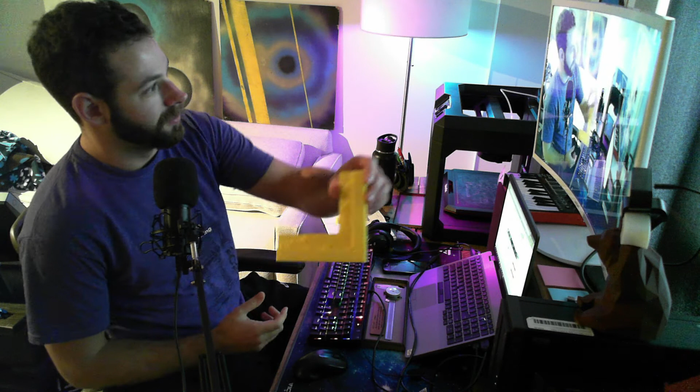All right, so I finished with my second iteration here. You can see this is my first one. The support material was really tough to get off. It printed like this, and then the piece that went in it was too thin, it snapped.

So I redid my design. I added a little flare to it. Now it's got an inlay, it printed in the opposite direction, so it's got its support raft. The raft prints to make sure it's easier to get off the build plate. So when you're done, you just peel the raft off. It might need to be sanded.

I probably won't do this finished design in yellow, but there you go, you can see it. It's got a hole so that you can mount it on the wall. That's going to have to be a little bit bigger.

And then here's the cap. So peel the raft off of this. There's also a fair amount of support material on this guy, which looks like it's going to be really difficult to get off. I'll do that here in a little bit. I may not end up using support.

In the meantime, it's not going to fit perfectly either way, because I'm a hypocrite. When I said that you need to match up sizes and they can't be perfect matches, because then it won't fit due to tolerances and the fact that prints aren't perfect, I didn't do that. So I'll have to remake that design with a slightly smaller hole.

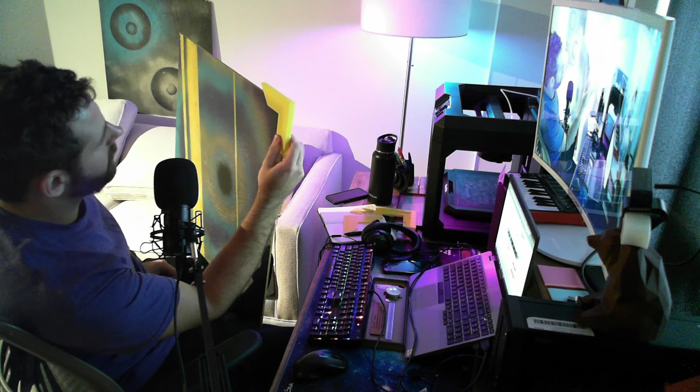So we'll take this piece down, see how that looks. Not too bad. I could probably push it a little further to the outside edge. Yeah, that would probably help, but it's about the right depth. Could be a little thinner, but that'll work for now.

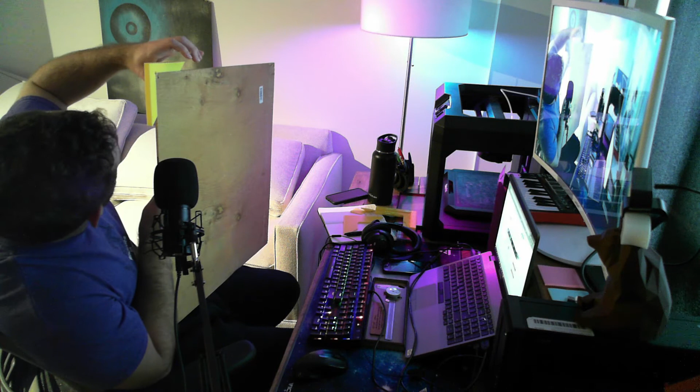So what I'm going to do, to improve the design, is instead of printing like this or like this, I'm going to try and print it upright and then add a slot to it so you can slide the corners in.

And then for the middle pieces, because I want them to be 1, 2, 3 in a row, I'll reflect this across this axis, so it'll be both. It'll look something like that. And then I'll add the hole in the center so you can hang it from the center point, and I won't need a hole on the outside edges because that's not where it's going to hang from. So I think printing like this will mitigate a couple of those problems.

It'll allow me, one, to print with an inlay or with a slot that you could put the piece into, and two, it'll make sure that it actually holds the piece. And I can fit more of them on a print bed.

So let's jump over to Tinkercad. I liked what I had here, but I am going to make a new one though. So we'll start a new design.

If you've ever used CAD before, you know that you save your design, let's say corner piece, and then the next one is corner piece V2, and then the next one is corner piece V2 final. And then finally you have corner piece V3, 3.1, corner piece, this is going to work this time. Basically, you can just rename it infinitely and follow no naming convention, because why would you do that? Why would you plan ahead?

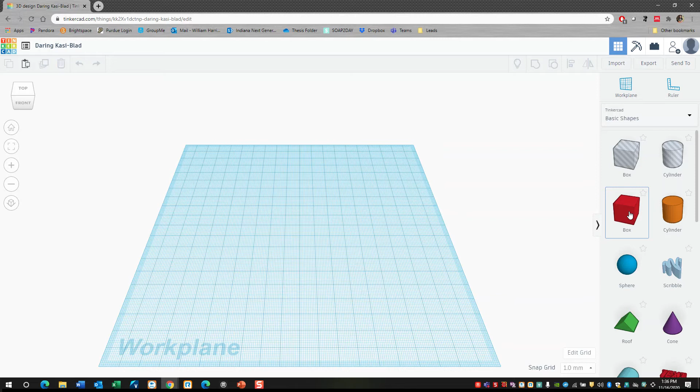So we'll start with our box. Again, I liked the 1/2 inch. It's about a 1/4 inch cutout. So I need to change my grid, I always forget to do that. Go inches. All right, awesome.

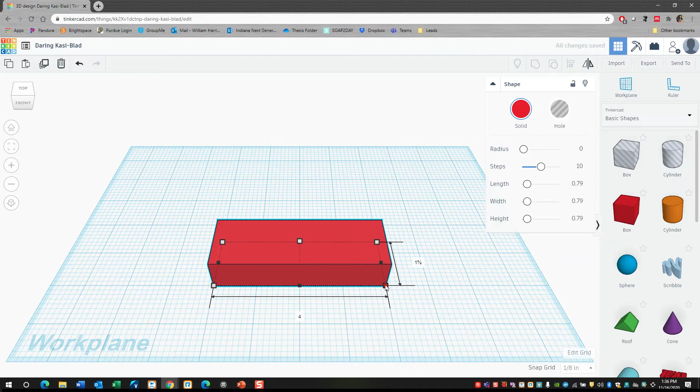So let's make it, let's see, what was this, 1.5 inches thick. Yeah, I think that works. So we have 1.5 inches.

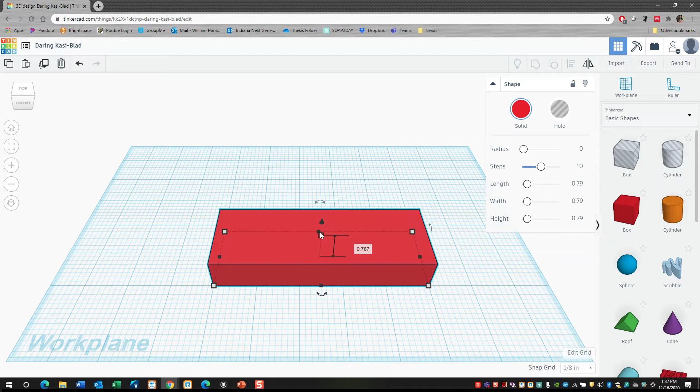Let's go 1 3/4 inches by 5. Yep, because then I can reflect it at 10. So we'll make it 1/2 inch thick. And then cut the corner off of it.

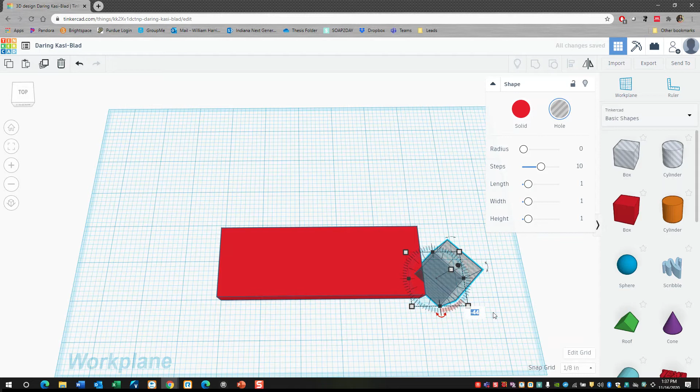And this is kind of the beauty of design, because you get to mess it up and then try new stuff. So it's a lot of iteration. And you hold shift so your angles stay constant. We'll match these corners up. Looks good to me.

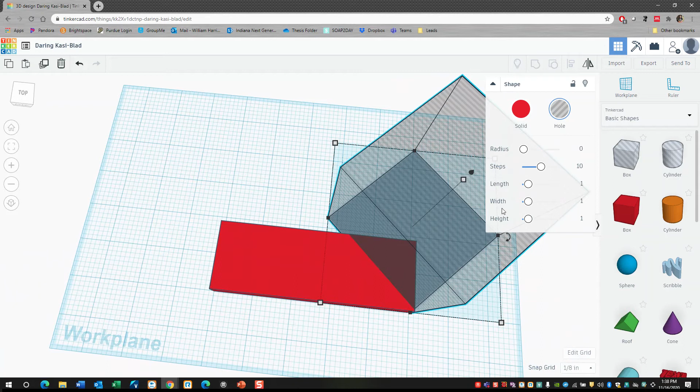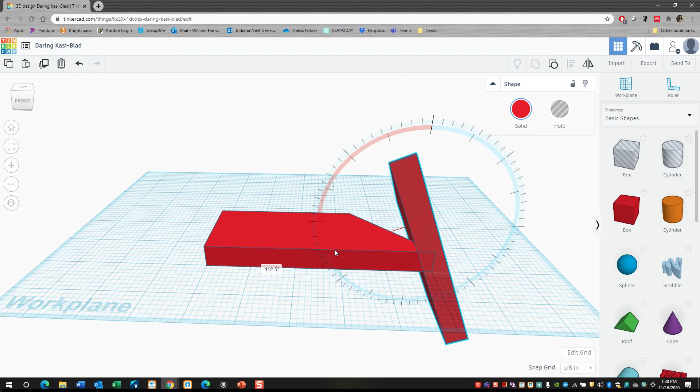Close enough. So then I can copy and paste this piece, and instead of doing it the way I did last time, I'm just going to flip it this direction and make sure it's 90.

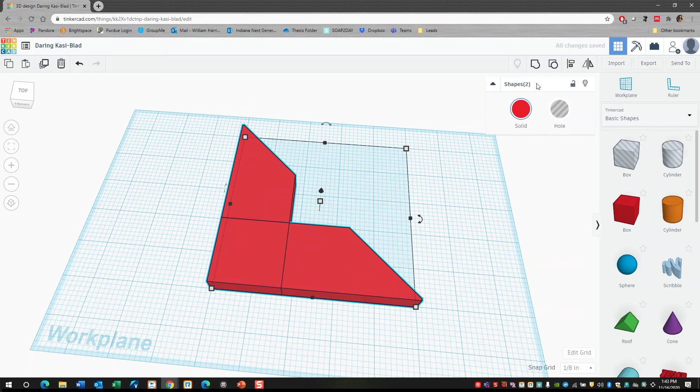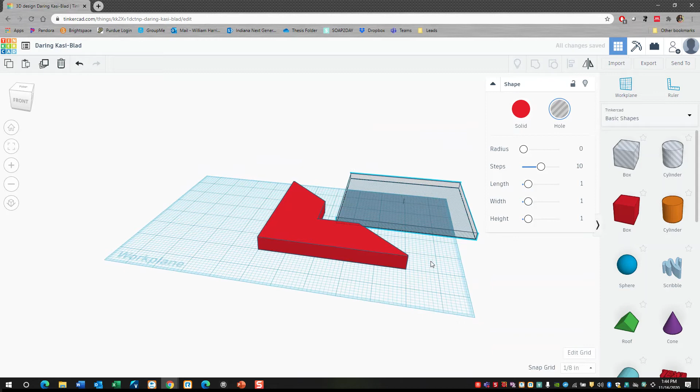All right, had to take care of a phone call. I'm back. So our next step is going to be to align these, connect them. Great. And then add the painting. Our placeholder is going to be a 1/4 inch thick. In this case, we're only going to lift 1/8, and then slide it into the middle.

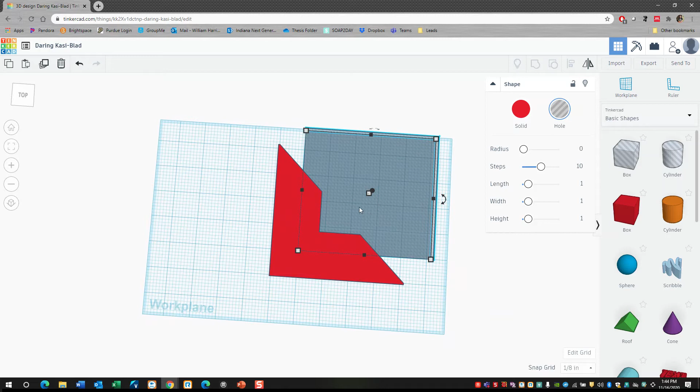I'm using the grid lines here to make sure I have this piece correct. Because I'm mirroring this and changing around where the hole is to hang it, I can actually go a little further into it. So that should work. Let's go one more. Feeling crazy.

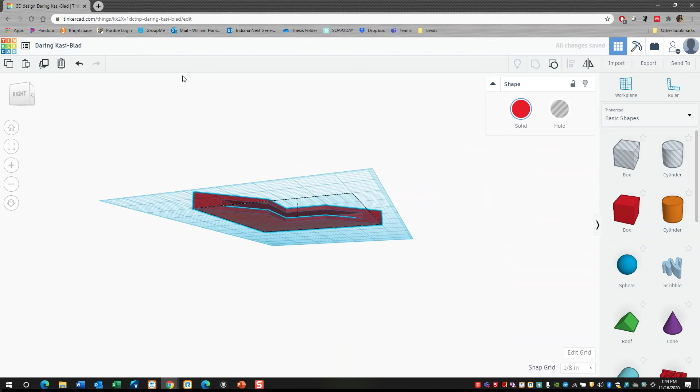So I'll combine these. So there's my cap. I could go ahead and print one of these, but I'd rather get my money's worth and print one of these as well as another, the middle piece that has the reflected piece on it.

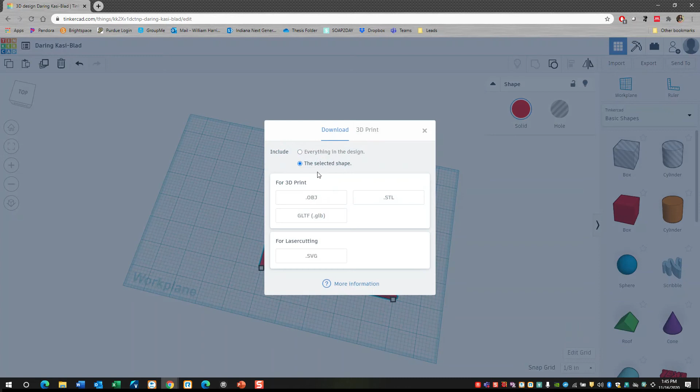So let's go ahead and export this piece to my desktop to 3D prints. Let's call it a fun name. Picture corner V2.

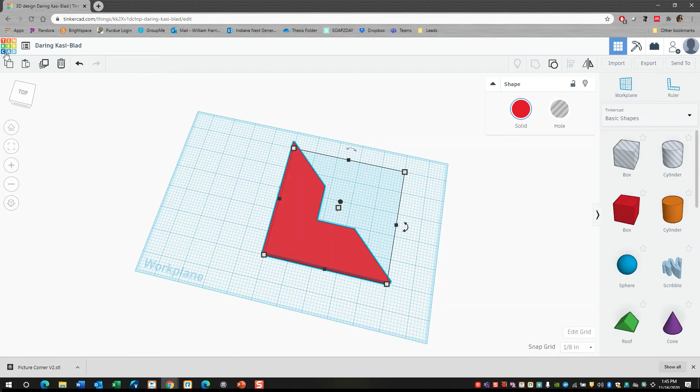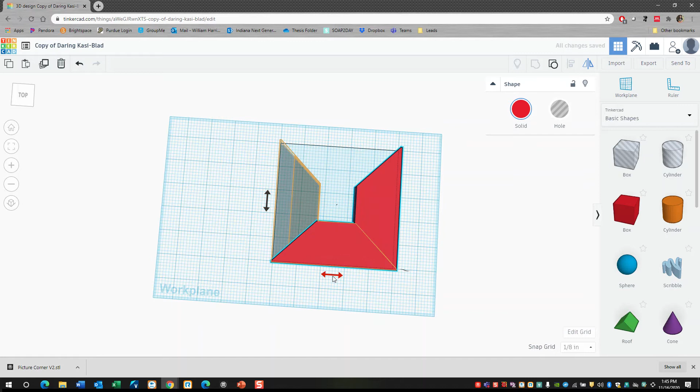And then I'm gonna create another one. So for this, I will duplicate my design, and then take this piece and mirror it. Okay, so it's not gonna let me do that. So instead I'll mirror it like this and connect the two pieces together.

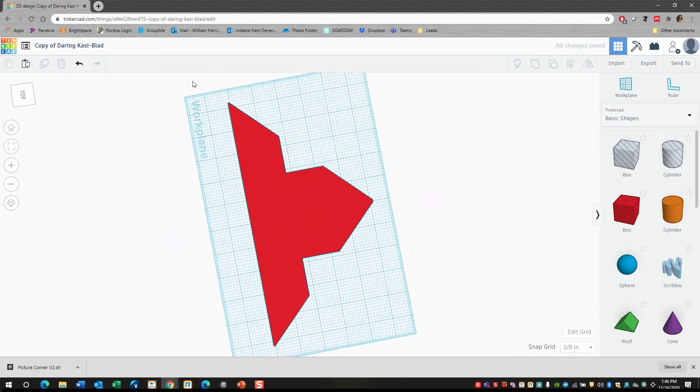Use my grid lines again. All right, awesome. And then I'll add a hole for the mounting. It's gonna have to be smaller than a 1/4 inch, which is what I did last time. So we'll go 1/8 by 1/8.

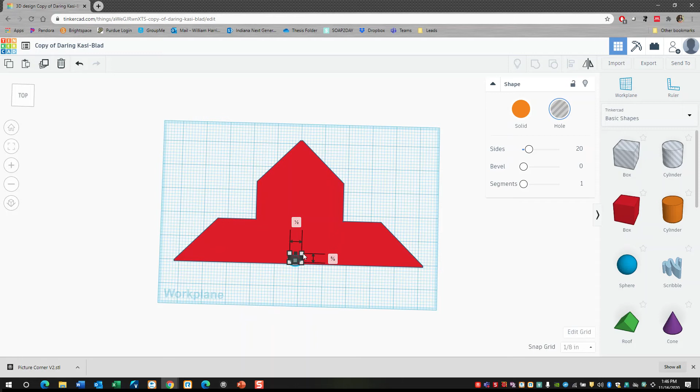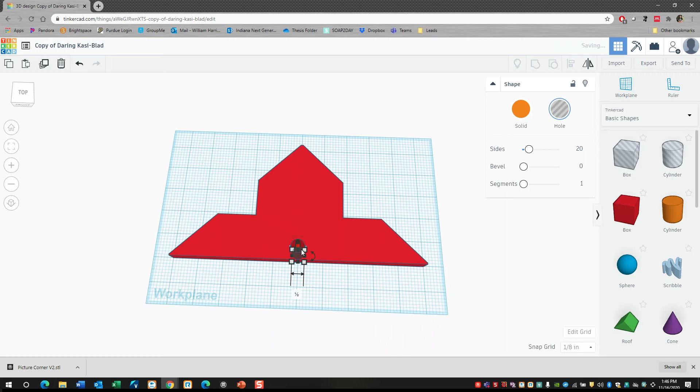And then if I want to make this either invisible or add a piece to it, I can not send it through all the way, which is what I'm going to end up doing. So I'll move it in just a little bit, and for the height, I'll make it almost go all the way through, but not quite.

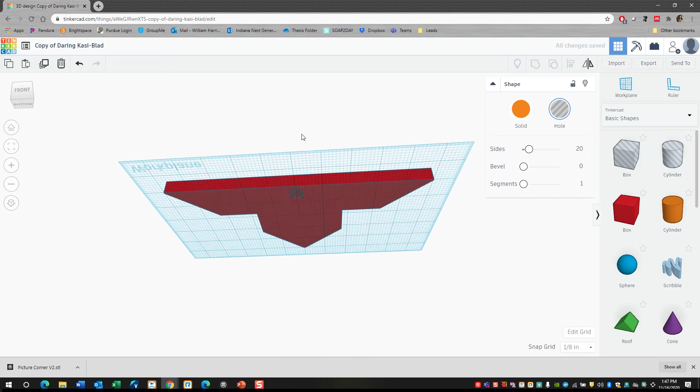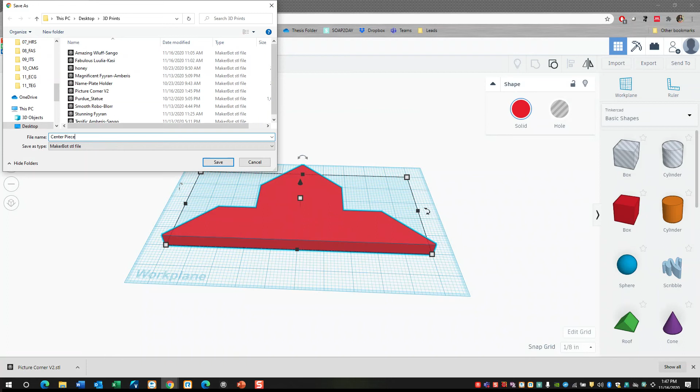And then combine these pieces, and I can export. Call it centerpiece V1, just for safety. Okay, so now I can go to my MakerBot, turn this preview off, add my models.

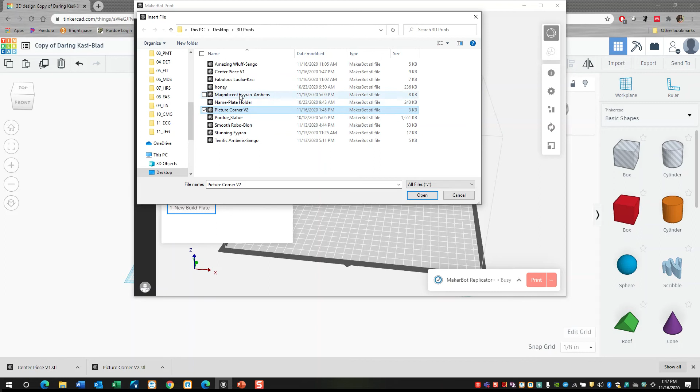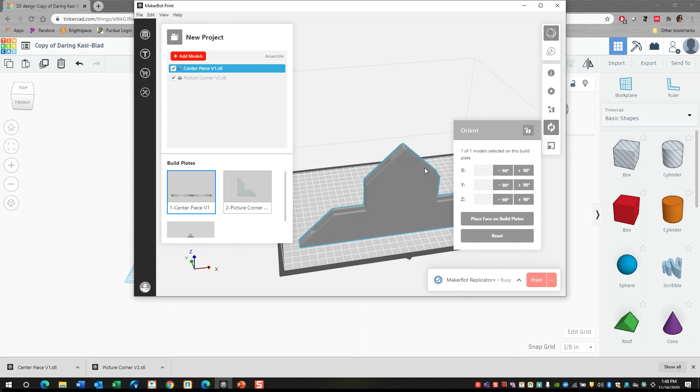Change my orientation. Now we're printing like this. And we'll see how precise this is. So it will do circles in the side. They're going to be a little bit deformed, but that shouldn't be a big issue.

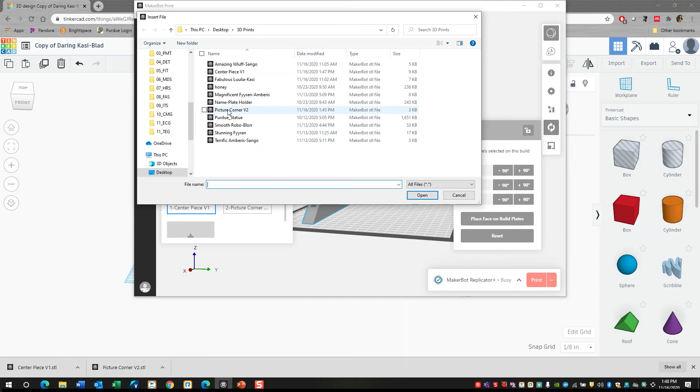This is just so I can hang it up with thumbtacks. So I'll add a model to this. Actually, yeah, I'll add a model to this so we can print them up both at the same time. Perfect.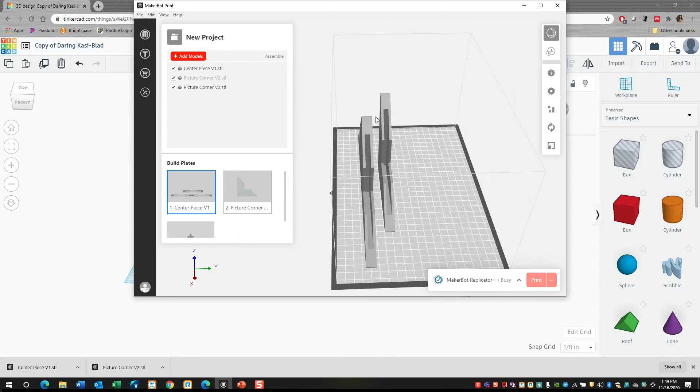So these both fit. They've both got the right orientation. I don't need any support material on this. If it tries to do support material, I'll just turn that off. There we go.

I'll clear this print, and then I can start a new one.

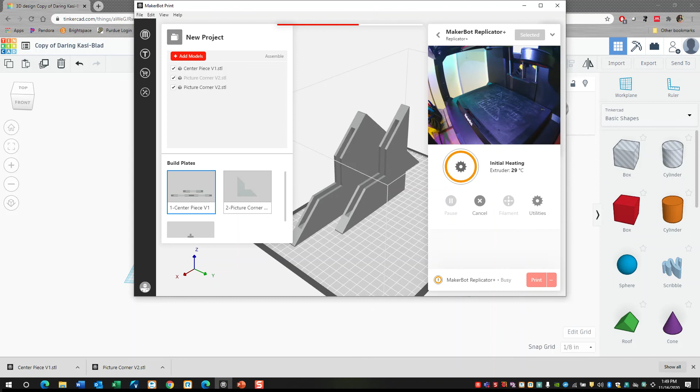So having this piece in my hand helped me understand, oh, I'd rather have it slot in. I don't even have to worry about the front if that happens. And why not print it upright instead of on its face? So hopefully that helped a little bit.

I'm kind of proud of this. Hopefully it turns out pretty good, and I'll have something to hang out my pictures.